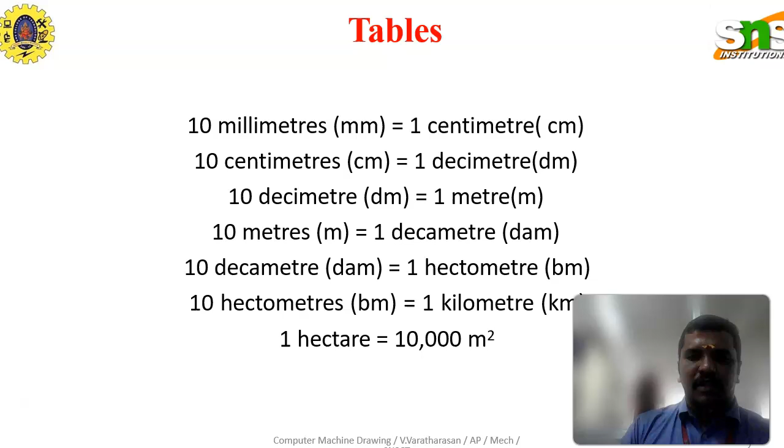So this video is a continuation from the previous video lecture. Before that we just want to refresh our previous lecture series. We saw in the first slide how the conversion takes place for the dimensions. Dimension plays an important role in the computer machine drawing subject: millimeter to centimeter, centimeter to decimeter, decimeter to meter. How the conversion takes place will be useful for enlarging scale and reduced scale also.

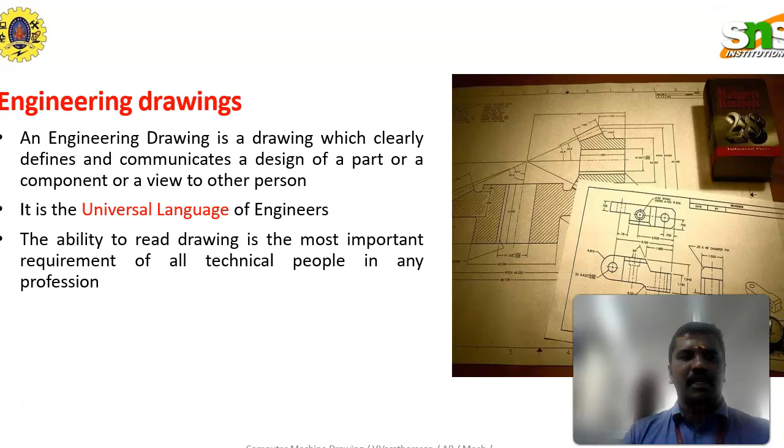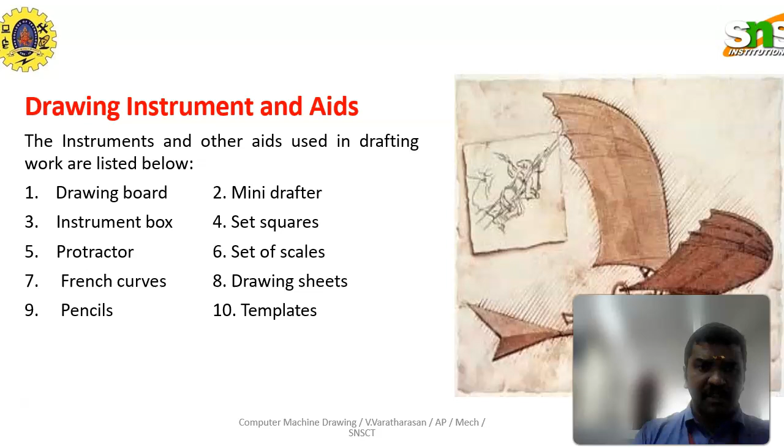So how engineering drawing is useful to communicate, how engineering drawing is useful for the mechanical engineer. It is a normal introduction in this particular slide. Next is what drawing instrument aids we will be using in this particular subject: drawing board, mini drafter, instrument box, set square, protractor, set of scales, French curves, drawing sheets, pencil, templates. These are the things we use as drawing instruments.

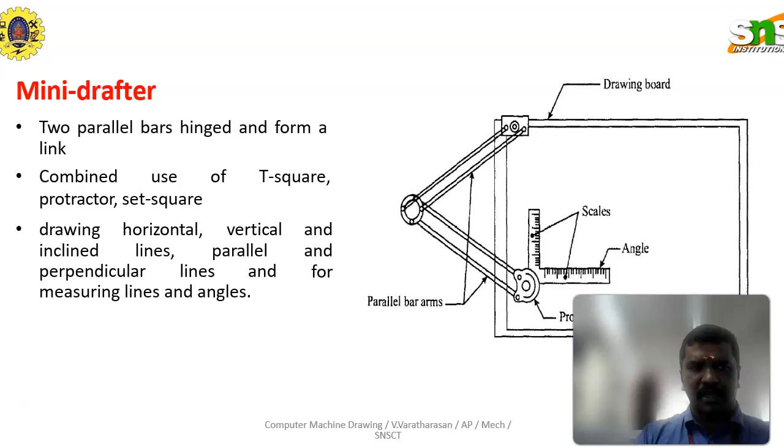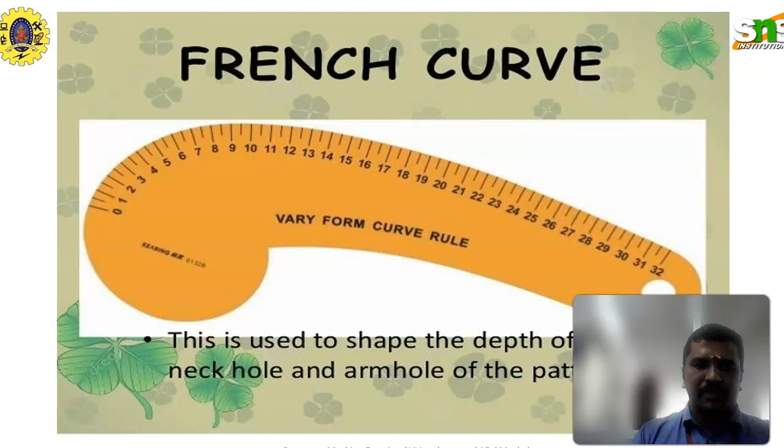One by one we saw how each and every instrument will be useful for the drawing, like the drawing board, mini drafter, instrument box and what equipment it contains, how the set square is used, and the clips, adhesive tapes, eraser, compass, French curve, and how the template is used for engineering drawing.

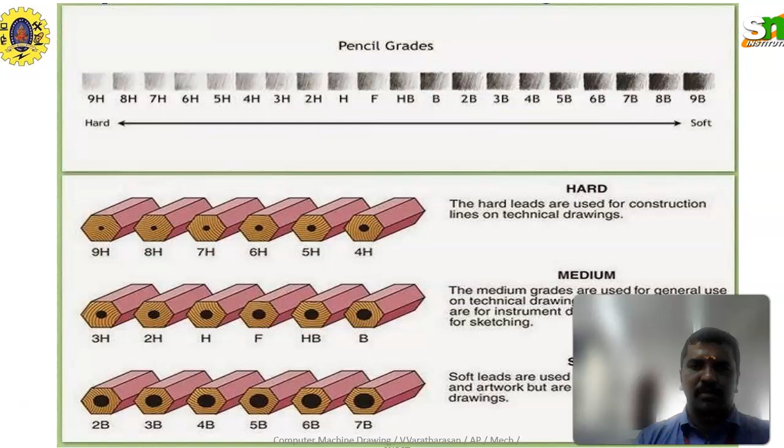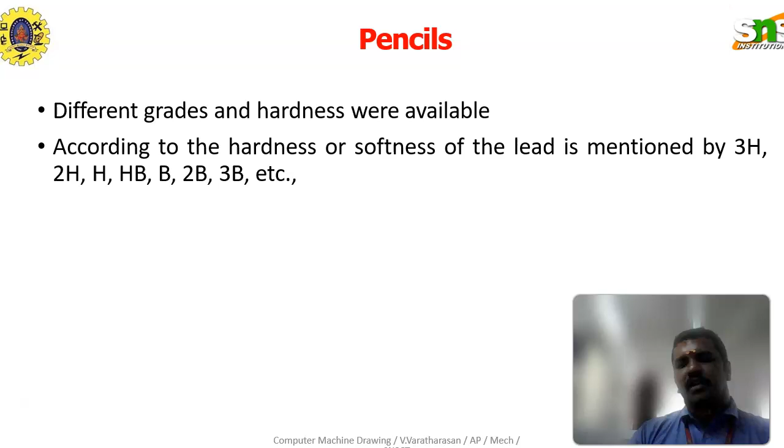This is a very important slide: how the pencil grade will be useful for this particular subject. H pencil, HB pencil, 2H pencil are used for hard, medium and soft. These are the different grades of pencil: H, HB, 2H, 2B, 3B. Here we are using H, 2H and HB. In this particular drawing, the main drawing uses the H pencil, the dimension lines use the 2H pencil, and the HB pencil is used for writing.

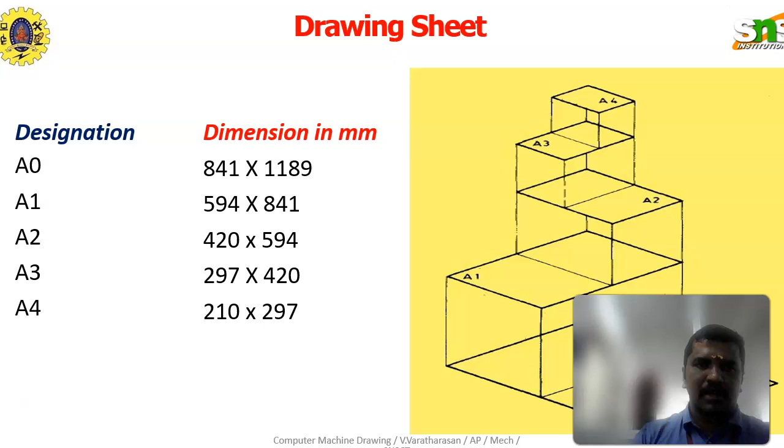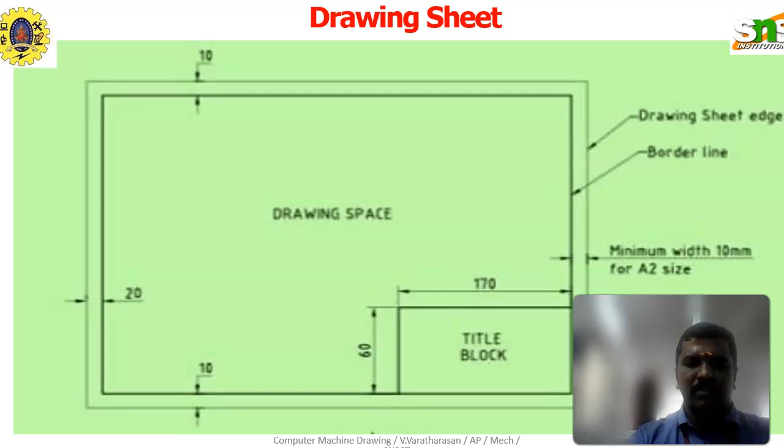So this is the drawing sheet, how the drawing sheet dimensions look, and how the drawing sheet gives space for each and everything like the margin and title block, and how we can allocate the title block measurements also. These are the things we have seen in the previous lecture series, and how the title block should look.

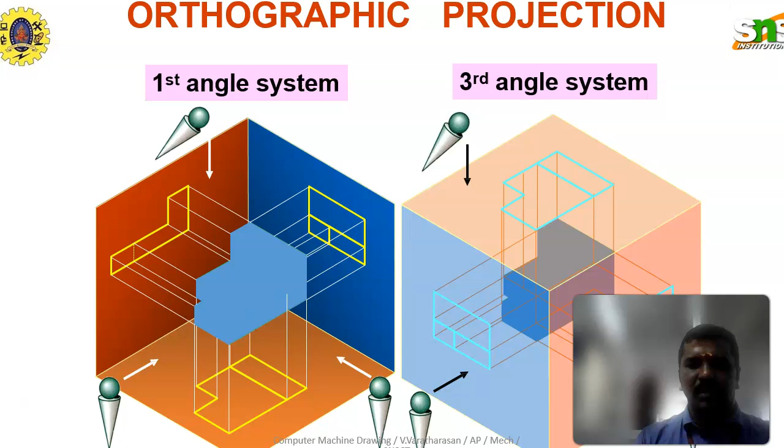How we can fill in the title block in the drawing sheet, what types of lines we saw, what the difference is in orthographic projection, and what is meant by first angle and third angle projection. These are the things we saw in the previous lecture series. And then different types of views we also saw: top view, front view and side view, right side view and left side view.

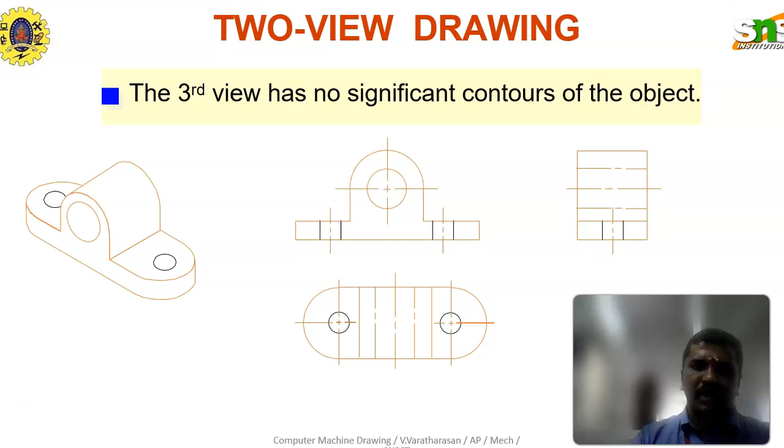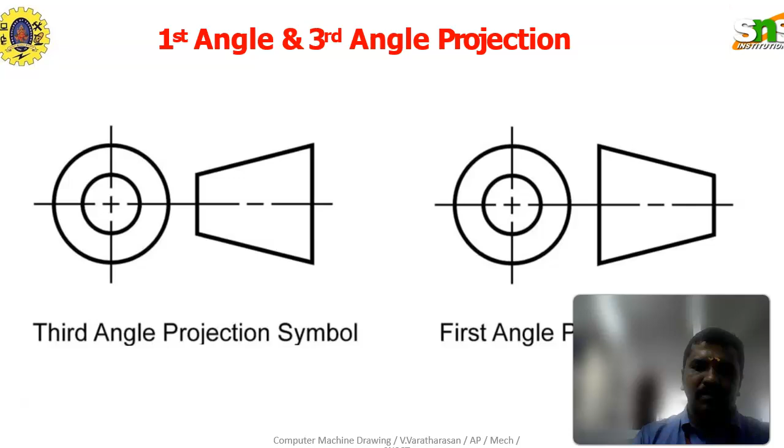So two view drawing also we are seeing, third angle of projections, by example how the views will be represented, the first angle of projection, third angle of projections, the first angle and third angle of projection symbol, how it will be represented in the title blocks. So it is a very important slide.

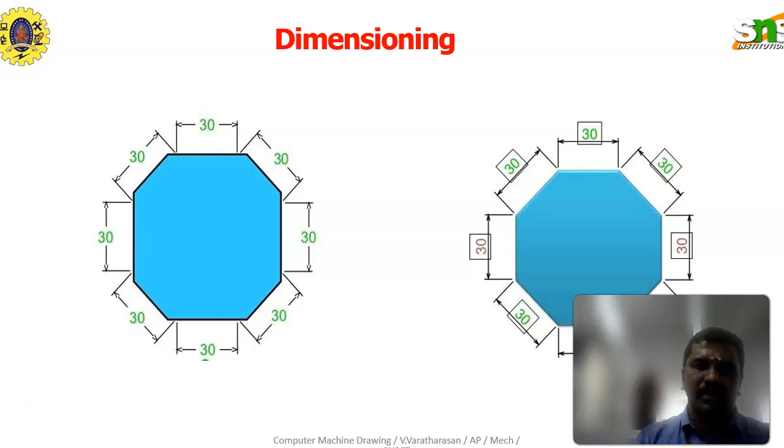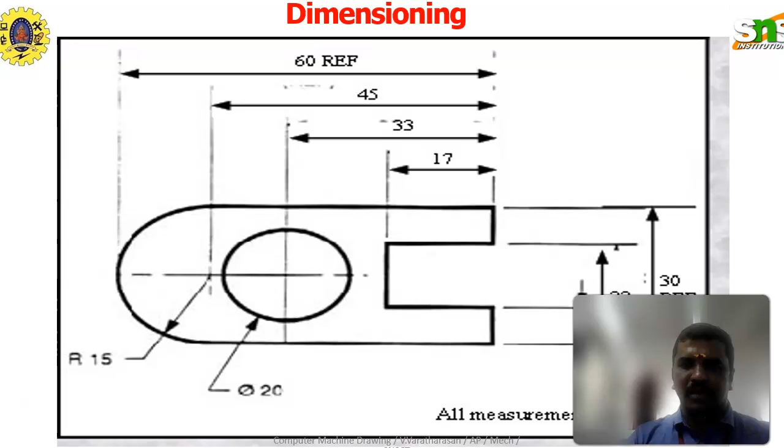And the next slide is the dimensioning line. So dimension, how it can be represented by the arrow mark representation. See here also the dimension representation. All measurements will be in millimeter. So based upon the figure, what is the correct dimension and the incorrect dimension based upon the view and the representation.

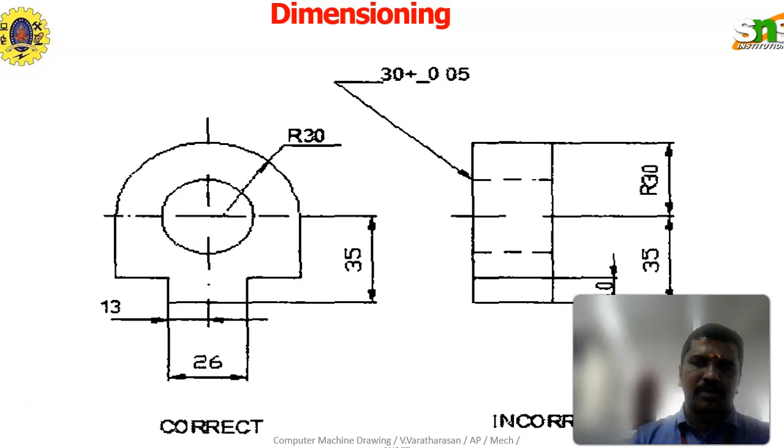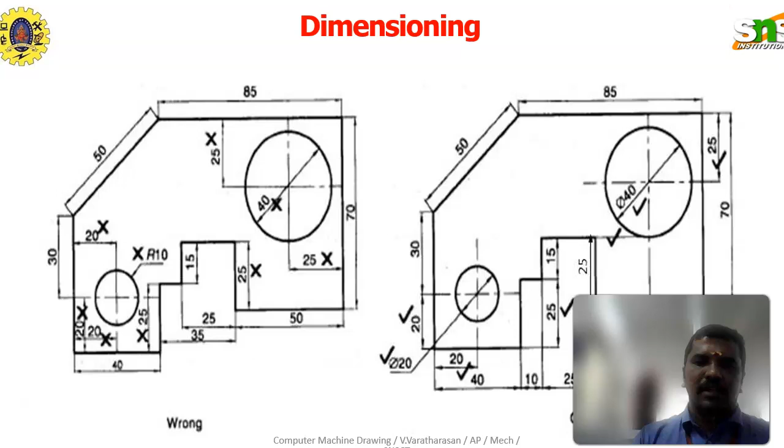Here in this figure it is clearly represented, and this figure also clearly represents how we can correct the dimensioning in the figure in the drawing. Okay. So this is one more example also.

This is another example. So here, lettering plays a very important role in the engineering drawing subject, because in the title block itself, each and every drawing we want to give a title and different specifications we want to represent in the drawing sheet.

Okay. So in this particular thing, we use lowercase or uppercase letters. So whatever the case of letter, we want to write it in a very legible, neat manner. Then only whoever studies the drawing sheet can easily identify and understand what things are represented in the diagram. So lettering plays a very important role in the drawing subject.

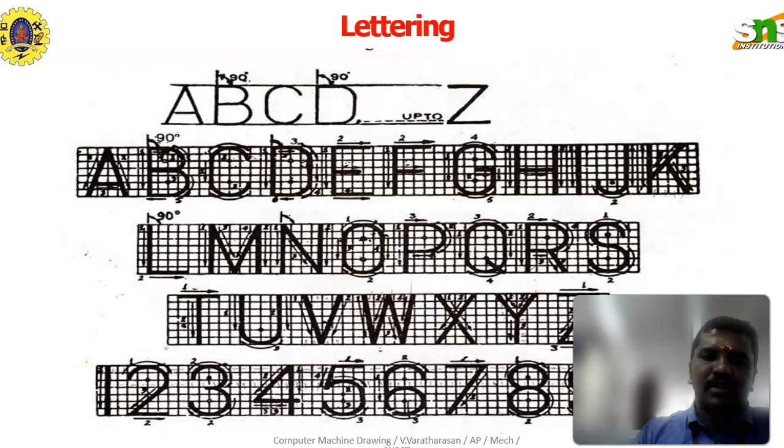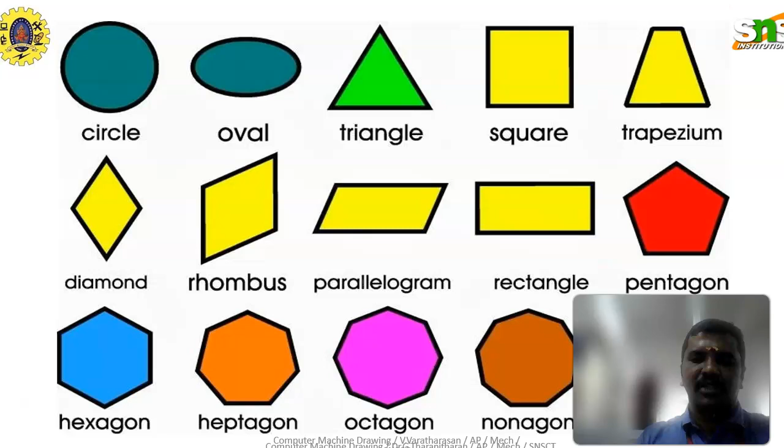Okay. So the different types of lettering, how they will be represented. What are the different types of figures and shapes used? Different types of laminas or planes. These are the planes. Okay, sheets, pentagon lamina or square lamina, triangle lamina. So here the curved surfaces, sphere, torus, prolate, oblate and cylindroid, cylindrical, hyperbolic, parabolic, hyperboloid. So how it will be represented?

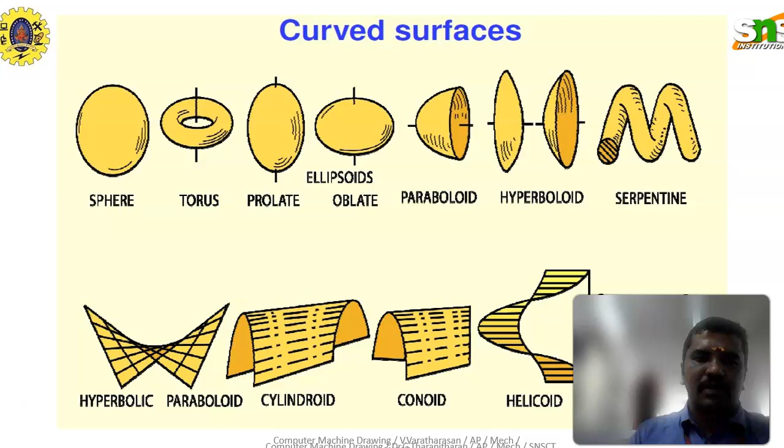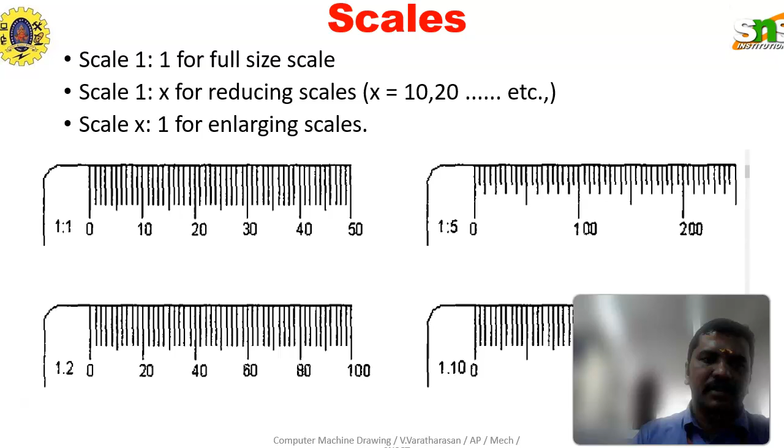Okay. So the scale is a very important thing. We already saw that 1:1 ratio; 1:X ratio is the reducing scale; X:1 is the enlarging scale. Okay. So bisecting the line by using a divider, compass, these things we use for bisecting a line, and dividing a line into equal parts. It is also represented in each and every step.

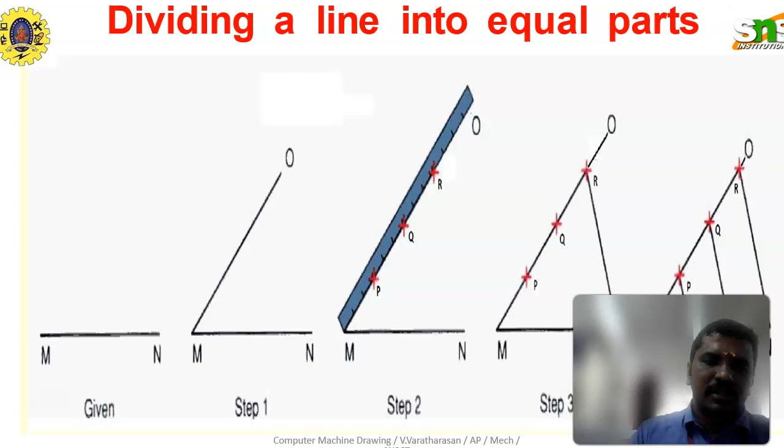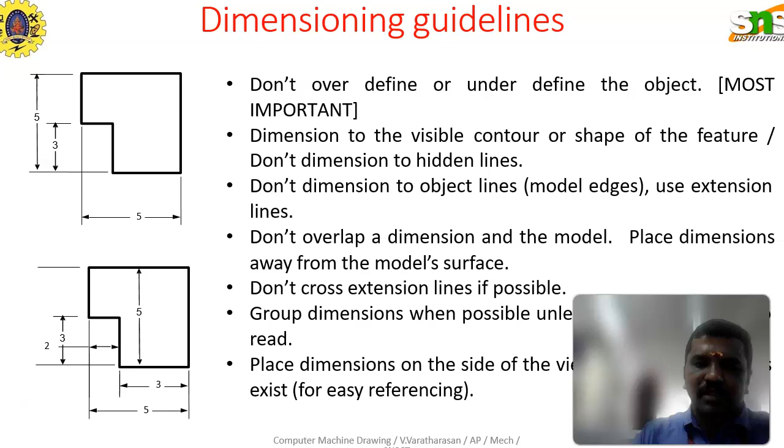Place dimensions away from the model surface. Don't cross the extension lines if possible. Group dimensions when possible unless it becomes difficult to read. Place the dimension on the side of the view where adjacent views exist for easy referencing.

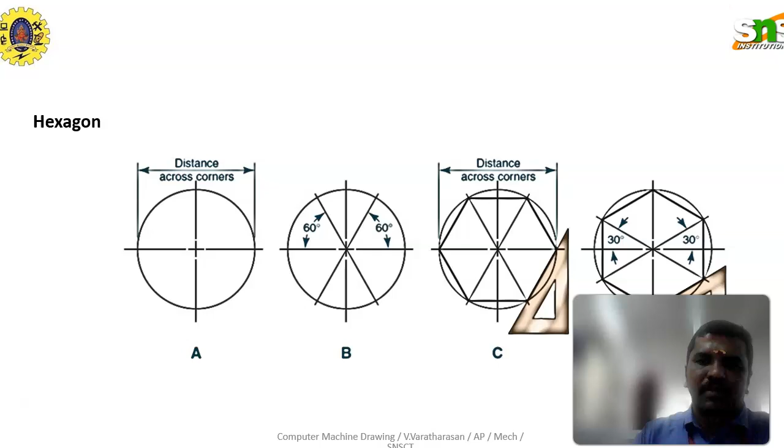So this is the hexagon drawing procedure. There are different types of hexagon drawing procedures available. The same thing here, hexagon also, hexagon, octagon. These are the standard codes we are using.

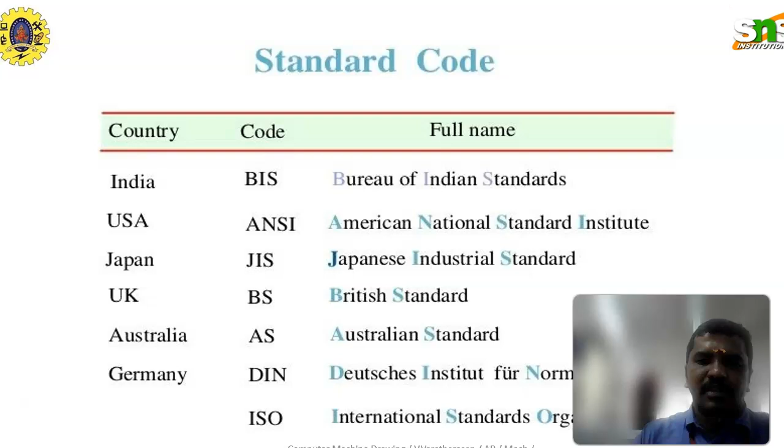India is using BIS. USA is ANSI, American National Standards Institute, and Japan JIS. BIS means Bureau of Indian Standards. JIS means Japanese Industrial Standard. BS, British Standard. AS is Australian Standard. DIN is the Deutsches Institut für Normung, and ISO is International Organization for Standardization.